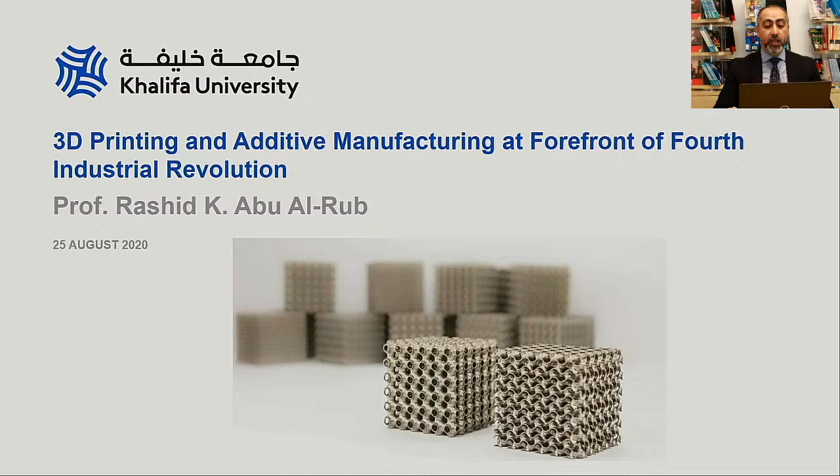Additive manufacturing is now a global disruptive technology which transforms many industries due to increased creativity in product design, easier production, reduced cost, and expedited on-demand manufacturing. Several UAE industries and governmental sectors started employing AM due to Dubai's strategy in 2016 in making it the world's 3D printing hub.

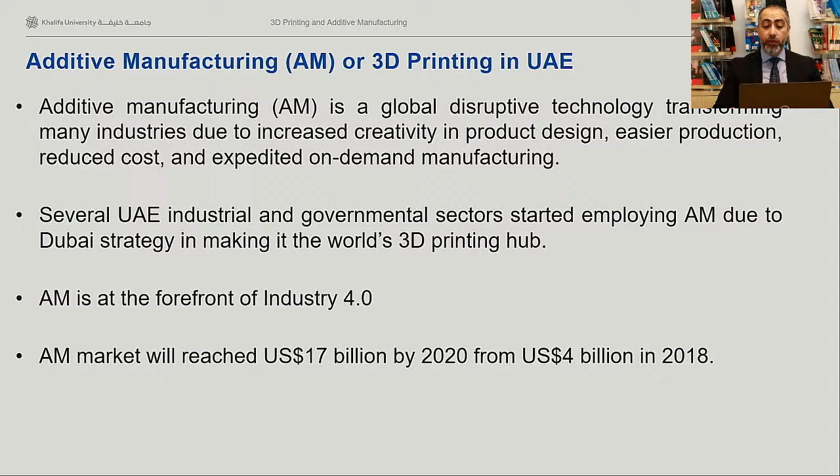AM is at the forefront of Industry 4.0, besides artificial intelligence, Internet of Things, robotics, and so on. The AM market reached 17 billion by 2020, from 4 billion in 2018. So we can see there is a significant increase in revenues coming from additive manufacturing, and there is an exponential growth these days in 3D printing.

UAE additive manufacturing strategy: in 2016, Sheikh Mohammed bin Rashid announced the strategy of making Dubai a hub for additive manufacturing, mainly focusing on construction.

Last July, His Highness Sheikh Hamdan bin Mohammed bin Rashid Al Maktoum announced the 3D Printing Strategic Alliance, stating: our goal is to accelerate the adoption and use of this emerging technology to support all governmental, economic, health, and scientific sectors in Dubai and the world. Through the Alliance, and in cooperation with 3D printing companies, we will enhance our industrial capabilities, secure our basic needs, and create new production lines based on the employment of future technology.

So that indicates the significant interest of the UAE in additive manufacturing. In fact, recently there has been news of a new ministry focusing on manufacturing and innovative technologies, led by His Excellency Dr. Sultan Al-Jaber, who is also the CEO of ADNOC.

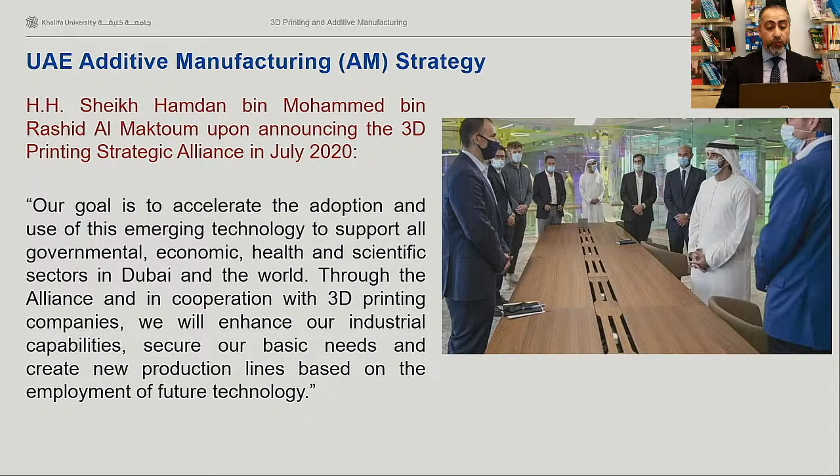Now, what is additive manufacturing? Commonly it is referred to as 3D printing. The industry really knows it as 3D printing, but these days they commonly refer to it as additive manufacturing. So it's one of the new manufacturing techniques.

3D printing used to be called rapid prototyping. People used to use it for making models in order to test their hypothesis or test their idea. Sometimes they used to call it solid freeform.

It's a process of joining materials to make objects from 3D model data, and it's a layer-by-layer process. Basically you build one layer, then bring the next layer on top of it, and the next layer, until you form the whole subject, which was first described in 1986 by Charles Hull.

Charles Hull filed a patent in 1986 describing the process, and we can see here a schematic from the patent itself showing the subject. You can see this is the laser source that is solidifying a layer at a time, and what we see here is a resin that, through the laser, will be solidified.

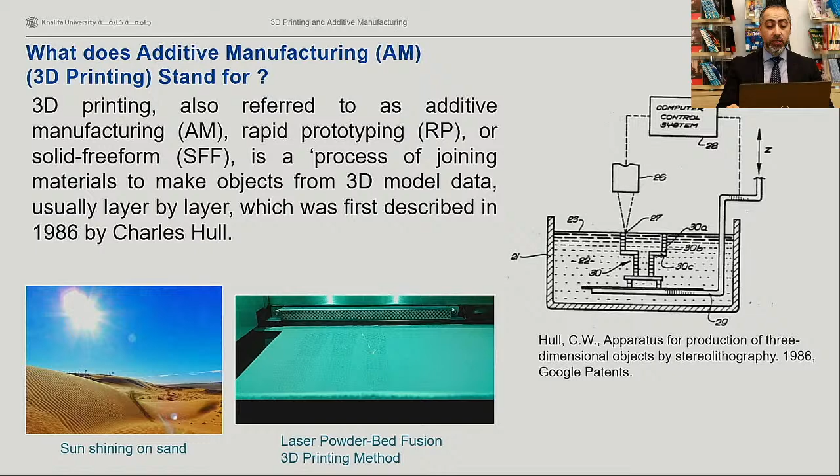That gentleman from Las Vegas went away from 3D printing, but his patent was later adapted by UT Austin, and they formed a company based on this patent. The patent filed by Charles Hull in 1986 resulted in one of the biggest companies in additive manufacturing, called 3D Systems, which is nowadays a leader in 3D printing.

Here I can show some examples of additive manufacturing techniques. One of the most famous and widely used techniques is what we refer to as the laser powder bed fusion technique.

So here you can see a laser source melting a powder layer. In this case, stainless steel powder is melted. The temperature from the laser exceeds the melting temperature of the powder, melting it layer by layer. Each subsequent layer has a thickness slightly bigger than the particle size of the powder. This process is a little slow, which is one of the disadvantages of additive manufacturing, and is why it's mainly used for niche or high value products these days.

Another technique used in the construction industry is material extrusion in construction. Here we see cement being diffused through a nozzle, and the cement has a certain fluidity that allows it to solidify immediately upon coming out of the nozzle. This is how buildings are being made these days, and the UAE is in fact one of the leaders in this additive manufacturing technique and its employment in making buildings, which will expand more in the near future.

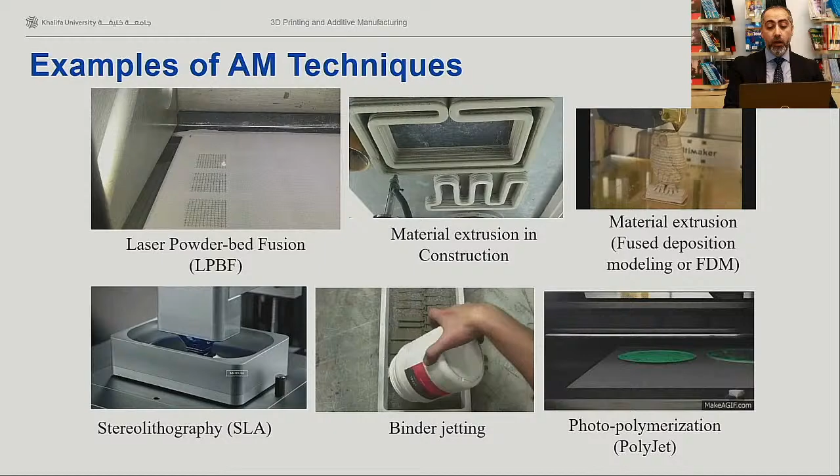Another additive manufacturing technique, one of the most widely used and the first kind of 3D printing technique, is fused deposition modeling, or FDM. Basically you have a filament made of plastic that passes through a nozzle, and the head of the nozzle heats the plastic filament, melts it, and deposits it layer by layer based on the object you want to print. It forms the object layer by layer in a relatively faster manner than other additive manufacturing techniques, and this technique is mostly used to print plastics or polymer structures.

These days it has also been used for making metallic components. In fact, a company now worth more than $2 billion, established in 2015, called Desktop Metal, uses the same technique used for FDM plastic printing to print metals.

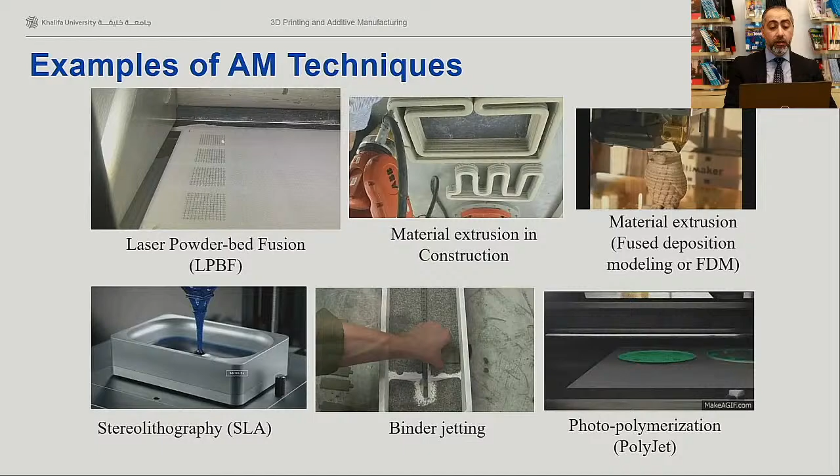Another technique, which is very good at making very detailed structures with high resolution, is stereolithography, which is based on using resins. That resin is solidified using a Blu-ray laser, similar to the laser used in Blu-ray CDs -- a low power laser. The nice thing about this technique is that it's relatively faster than other techniques, and it also allows you to print with very high resolution.

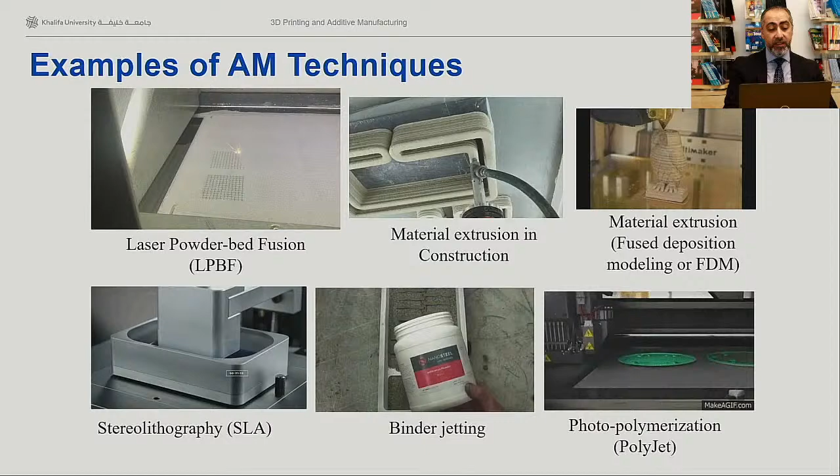Here you can see the Eiffel Tower being printed. Of course this is not real time, this is an accelerated video. To actually print that Eiffel Tower would take about 3 to 5 hours, depending on the resolution.

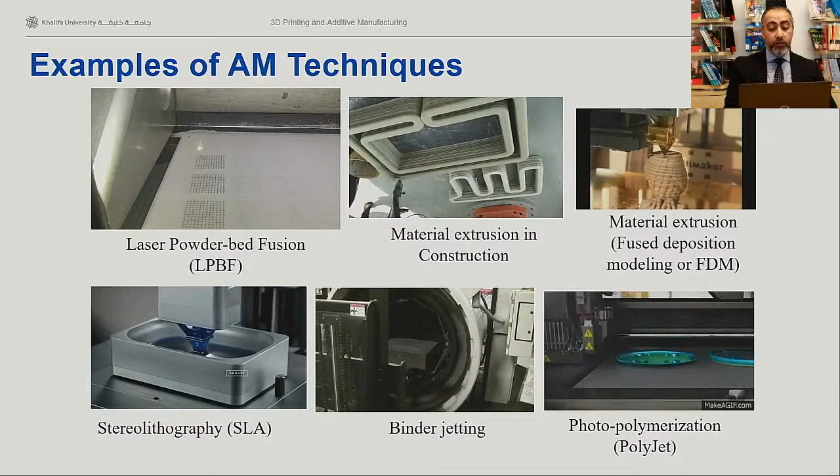Another technique being developed is binder jetting. This is also a technique based on using powder, mainly used by architecture engineers for printing models or architectural models out of gypsum. This technique is not mainly used for end user products as compared to the other techniques.

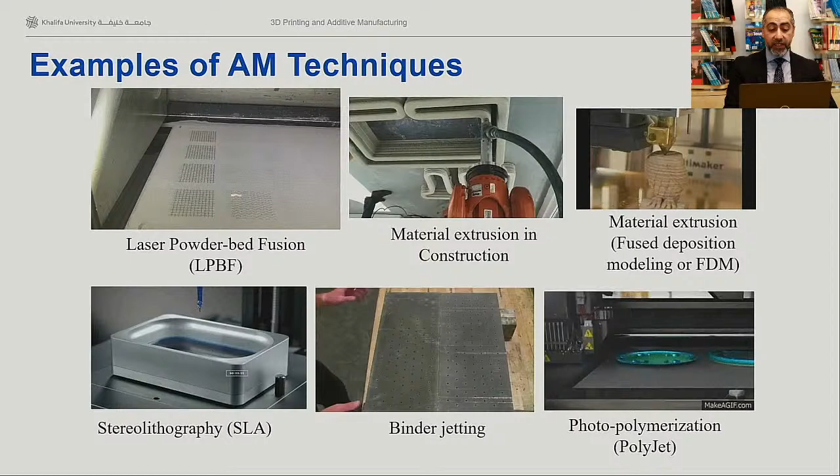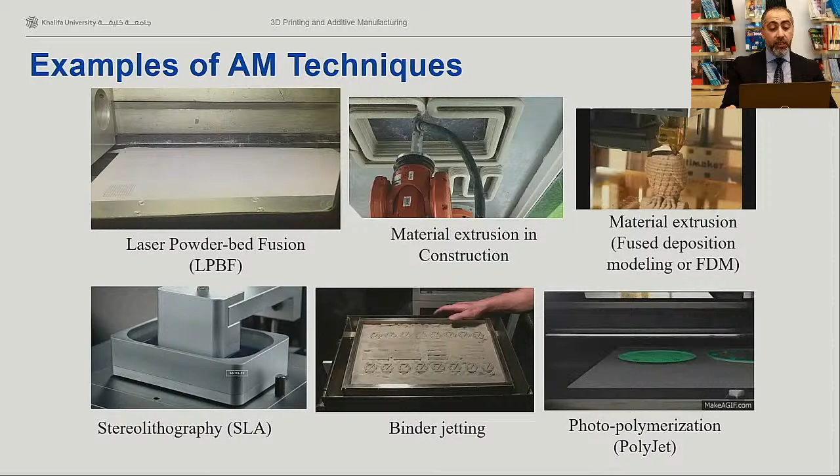Another technique is called photopolymerization, or polyjet. Here you can see a resin deposited layer per layer, and then a UV light cures that resin and solidifies it to make the structure. So these are some of the most famous additive manufacturing techniques that have been established.

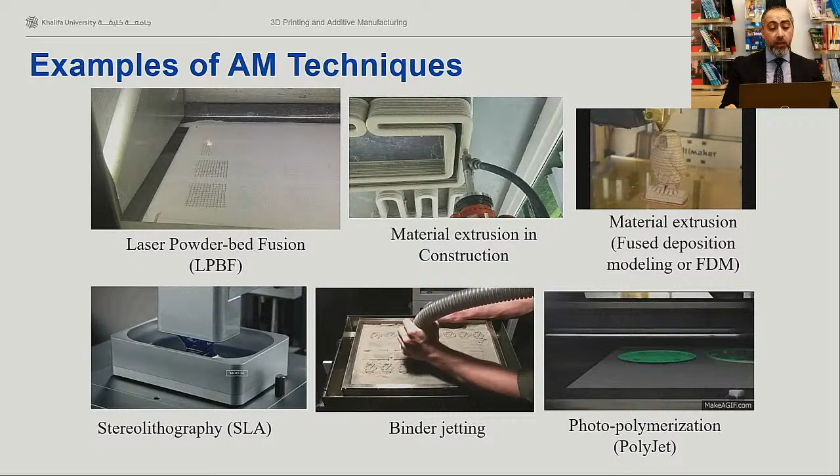As I mentioned earlier, there is a boom in 3D printing, and new techniques are coming up almost constantly to address some of the challenges facing the additive manufacturing industry, which I will highlight later in my slides.

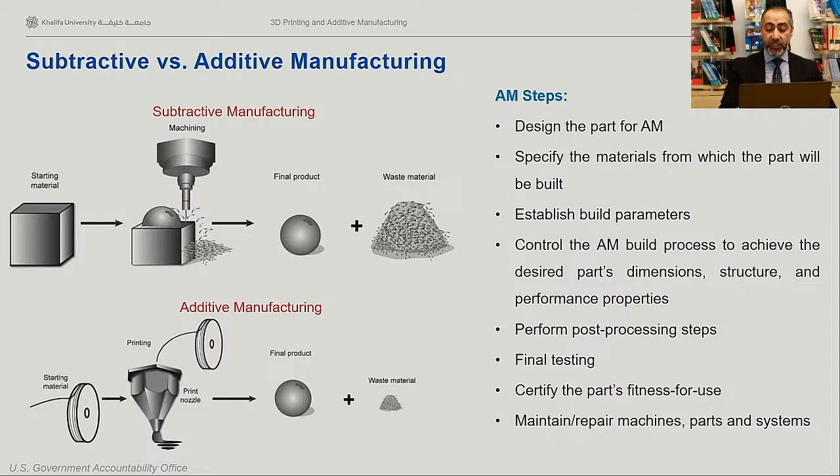You do final testing in order to certify the component in case you want to use it in a certain application. The other final step is to maintain and repair the machine, replacing certain parts of the 3D printer.

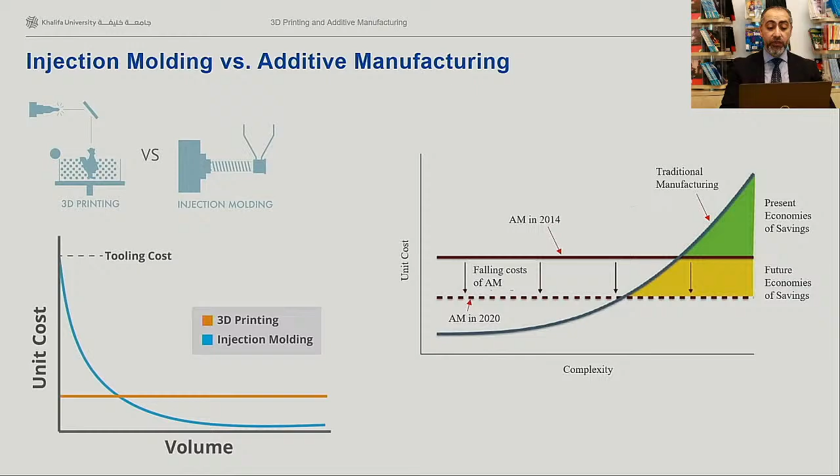So you can see here the falling costs of additive manufacturing from 2014 to 2020. Basically, it's reducing the cost more and more, and we expect this to be enhanced further, with the cost reduced more with more developments in the coming few years.

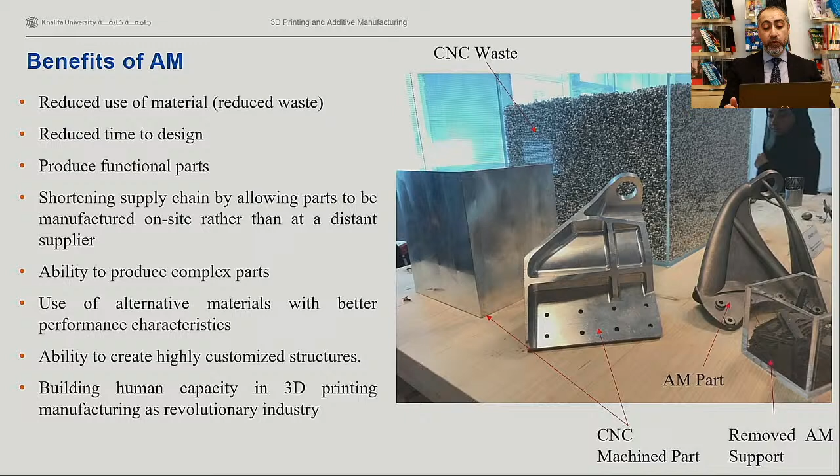Building human capacity in 3D printing manufacturing is a revolution in industry. A lot of students these days are interested in entering the field of additive manufacturing because the demand for people with expertise in this field is increasing exponentially with time, especially here in UAE. So with AM, you seriously need to dream big - all the time we say the sky is the limit with additive manufacturing.

So the process starts with the design. Since there's no limitation in the complexity of the structure you can design, you can design your component to be more functional, more cost effective, and to perform in a much better way.

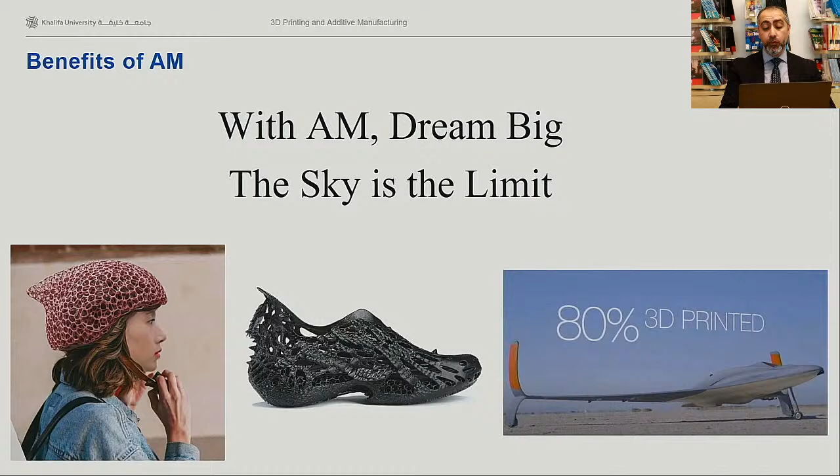UAVs, unmanned air vehicles that are 80% 3D printed, which has been demonstrated recently. These are some examples of industrial applications of additive manufacturing.

The leaders in additive manufacturing have so far been aerospace, and the reason is that it's a niche industry where cost is not really a big issue compared to other industries. This is why they're willing to invest money for the sake of enhancing performance and the safety of the airplane.

You can see some of the components here. This is a fuel nozzle fabricated by GE, which was a game changer in 2015 because they used to fabricate it out of 20 components, but with additive manufacturing they fabricate it in one shot without any joints, which reduces the time. In fact, they redesigned this fuel nozzle to enhance performance.

You can see applications in medical, specifically in the dental industry, where additive manufacturing is used for customized implants for the human body, or here for dental applications.

Other applications are also in space, looking into additive manufacturing specifically for enhancing performance and lightweightness. You can see here a very successful example done by Etihad Airways.

We helped as Khalifa University in giving the needed expertise for Etihad Airways to achieve this great milestone, which is that they printed the shroud, or the video monitor. So we reverse engineered it and printed it to be exactly the same as the one fabricated by traditional techniques. It has been certified within 6 months, so it was a very successful story.

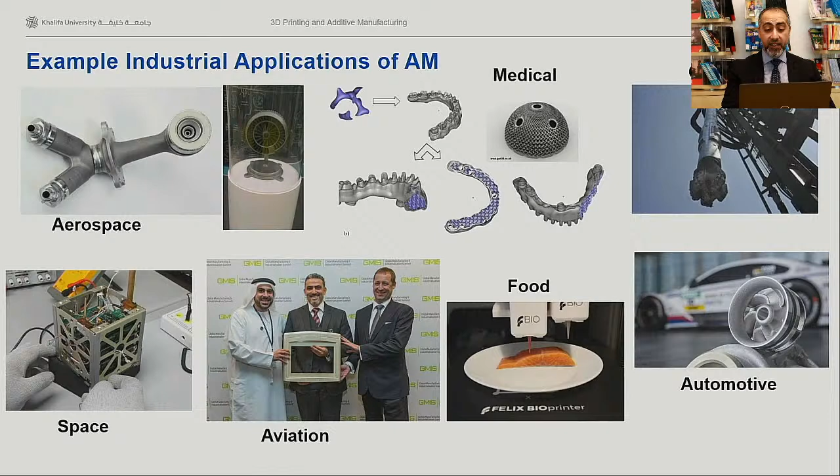In the construction industry, Dubai and the UAE in general are these days a leader in additive manufacturing or 3D printing in building and construction. As I mentioned earlier, Dubai plans to have 25% of all buildings built with 3D printing by 2030. So this is one of the objectives of making Dubai and UAE a hub of additive manufacturing.

We can see here the world's first 3D printed office in Dubai. And just last year, this 2-story building, which is Dubai's largest 3D printed structure in the world, 9.5 meters tall with a total area of 640 square meters, was fabricated through additive manufacturing.

We can see the real potential of additive manufacturing in the construction industry in reducing construction time. There are a lot of areas where houses are missing, and areas with wars and refugees who need homes. Imagine how 3D printing can be used to construct structures within a matter of a day - that's definitely a game changer.

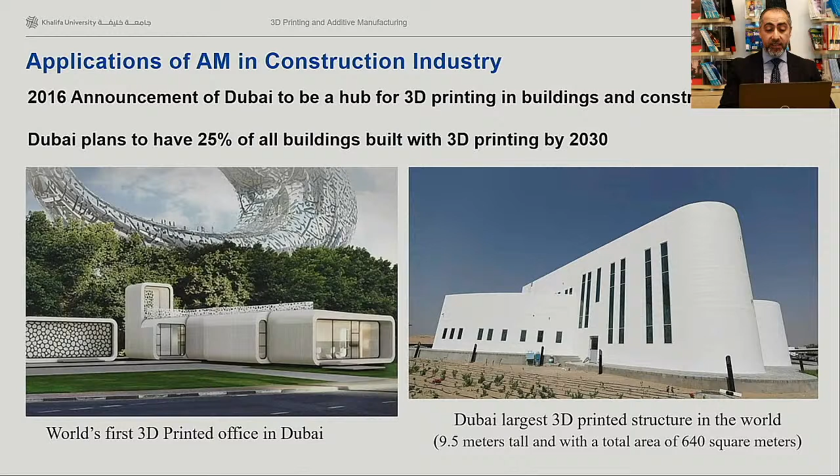Opportunities available through AM, as I mentioned, include complex parts, especially complex spare parts. Imagine you have your inventory of components, and you can reverse engineer a component - scan it, convert it to a CAD file, and then print it.

A lot of components these days in many companies - in the nuclear industry, oil and gas industry, aerospace industry - certain components cannot be fabricated anymore because the supply chain is closed. So if you have the old component, you can reverse engineer it, create the CAD file, and print it.

The spare parts can be fabricated in one shot. As we said, this means material saving. It can be used for mass production, with less post-processing.

This is an example here - I show the reverse engineering process of a component that we developed in collaboration with Abu Dhabi Police. For example, in a hit and run case, where somebody hits you and runs away, you couldn't catch the license number, but you reported the accident.

You can see here, for example, a component of the rim. Some of the debris left at the accident scene can be reverse engineered, printed, and sent to service stations for checking. Once the car comes to these service stations for repair, they can know exactly the size and shape of the component left at the accident scene, and they could be able to catch the person who caused the accident.

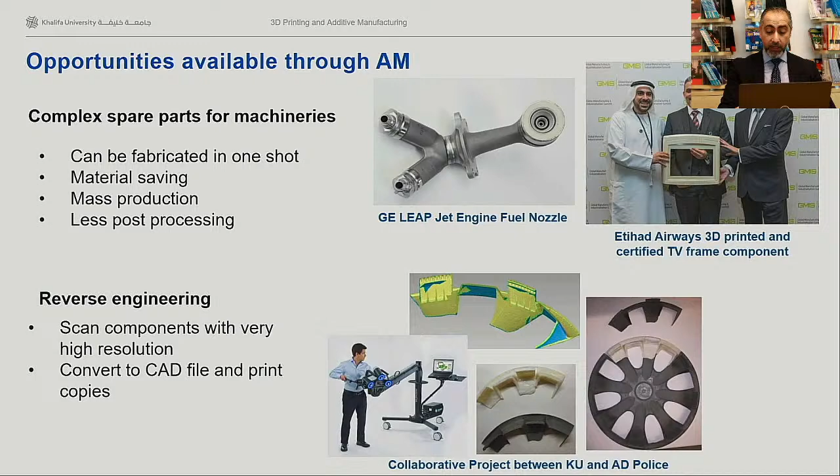One of the advantages of additive manufacturing is that it makes stronger parts. AM has been used to fabricate a common stainless steel, which imparts a unique microstructure, making it stronger and more ductile than production with conventional methods.

You can see the unique microstructure because of 3D printing. This is for stainless steel, and you can see the microstructure is very complicated. There's a lot of what we call dislocations, and these dislocations are responsible for strengthening, making the structure stronger.

You can see here, for example, the strength versus the elongation, how much you stretch the component. These curves show the component made of stainless steel tested, having much higher strength and much higher ductility, or strain to failure, as compared to conventional techniques. That's a huge value. You are making the same component with the same material, but with a different fabrication technique, you end up with a much stronger component.

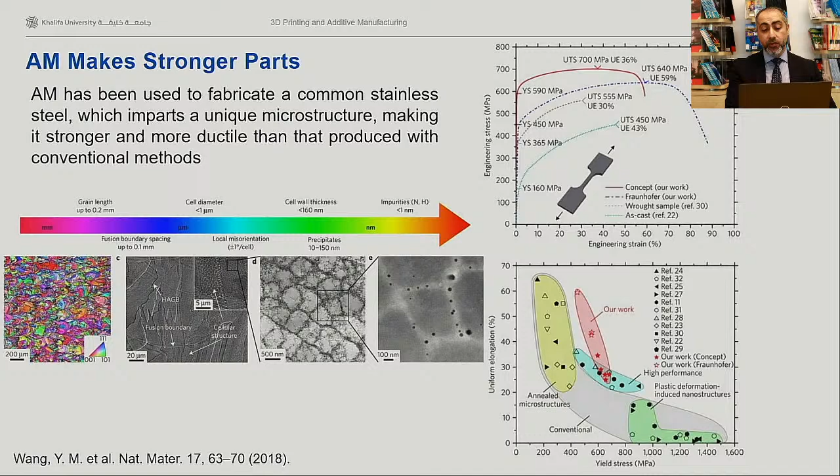Another big thing that needs to be developed in additive manufacturing, especially because it is still in the development stage, is materials. There are a limited number of materials available for 3D printing as compared to conventional techniques. For conventional techniques there are millions of material options, while for 3D printing there are thousands. So you can really count the materials available for 3D printing. There is a need for development of new materials.

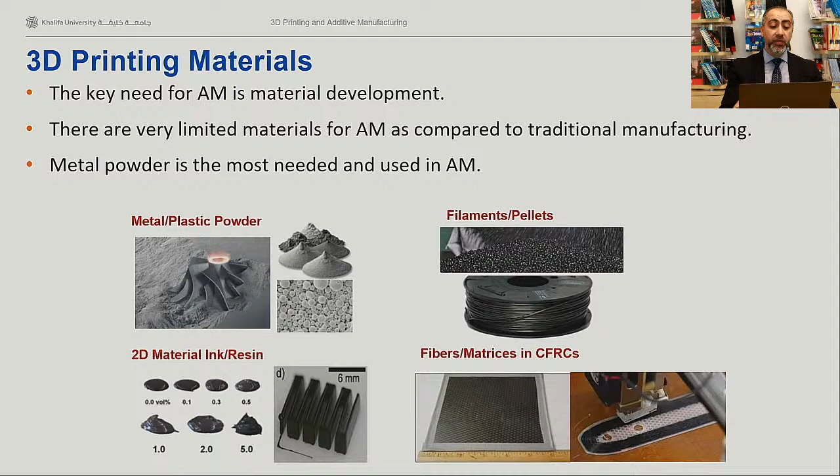In fact, metal powder is the most needed and used material in additive manufacturing. Metallic additive manufacturing, to print metallic components, is becoming really hot these days, and a lot of companies are looking at 3D printing with metals. You can see materials made in the form of powder, materials made in the form of filaments or pellets, as Borouge here in UAE is doing, or materials in the form of ink or resin, or even composites in terms of fibers and matrices. These types of materials are being developed for additive manufacturing.

The challenges of additive manufacturing: first, guidelines for selecting additive versus subtractive manufacturing. How do you choose whether to make a component through additive manufacturing with 3D printing or through traditional techniques? These guidelines are being developed but are not yet fully developed.

Standards for using recycling and reuse of materials are needed. In metallic 3D printing, you're using powder and need to recycle it for reuse, so there should be standards. Standards for environmental conditions affecting AM material, heat treatments and procedures needed to reduce anisotropy, meaning changing properties in different directions, are also needed, along with guidelines for post-processing and standards to obtain minimum properties, qualification, and certification for parts.

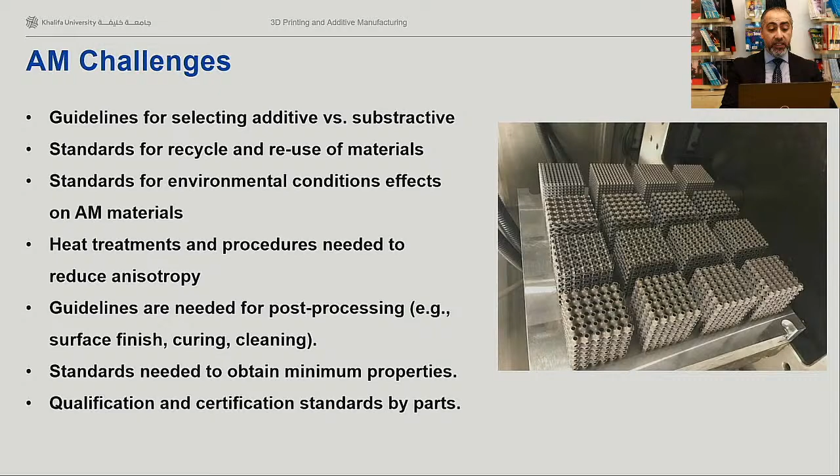All of these are needed. Some of these challenges are being addressed by the American Society of Testing Materials Additive Manufacturing Committee, established in 2009, which now has about 900 members. We are going to be a UAE member very soon. More than 25 standards have been developed, all focusing on the employment of additive manufacturing and how to certify and qualify an additively fabricated component.

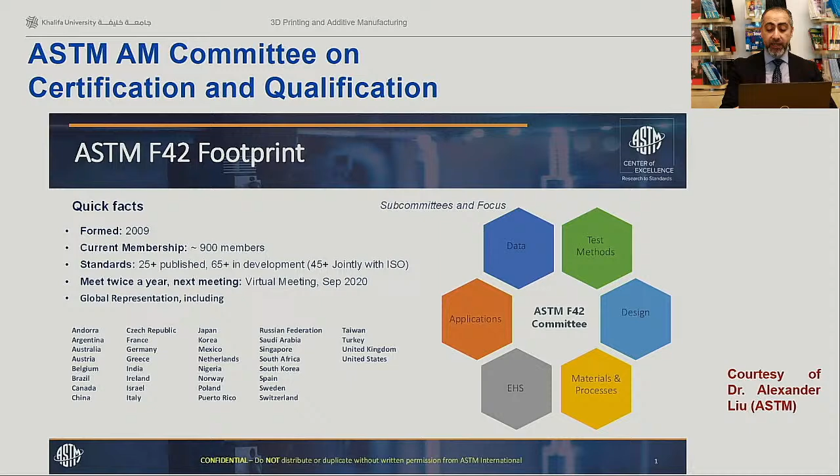Here at Khalifa University, we were one of the leaders in UAE in additive manufacturing, starting from 2013, where we reached out to several industries in UAE to make them aware of the importance of this new additive manufacturing technique. We established ADAM Center in July 2019. ADAM stands for Advanced Digital and Additive Manufacturing Center, and it serves as a state-of-the-art research, development and educational facility in the area of AM, and will be a platform to provide services to industries across the UAE. It will also be used as a platform for capacity building, for educating students, and for educating industry leaders about the importance of additive manufacturing.

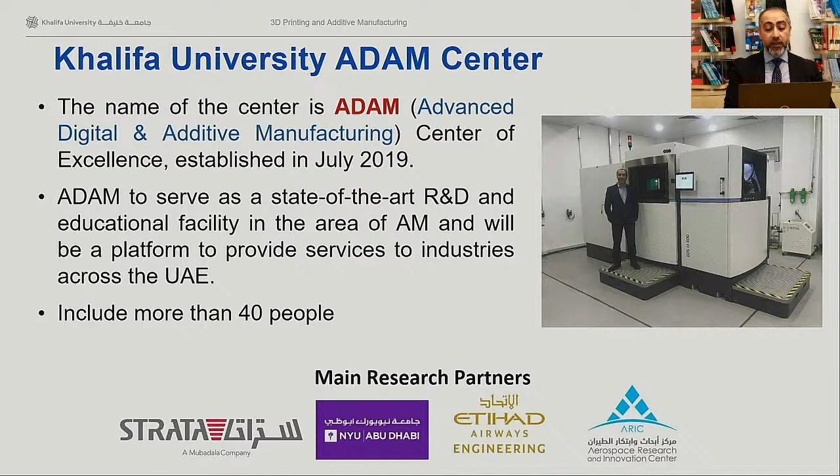We have more than 40 people right now, with faculty, students, and postdocs working within the center. Our main research partners include Strata, a big player with us, New York University Abu Dhabi, a close collaborator, Etihad Airways, and the Aerospace Research and Innovation Center.

The themes of the Additive Manufacturing Center span the whole process of 3D printing, starting from the design process of the component, then the materials needed for printing, how to make the component lighter and more functional, looking at the properties of that component, and even the certification and qualification of the component. Theme 5, as I mentioned, focuses on education, making workshops for students and for the industry.

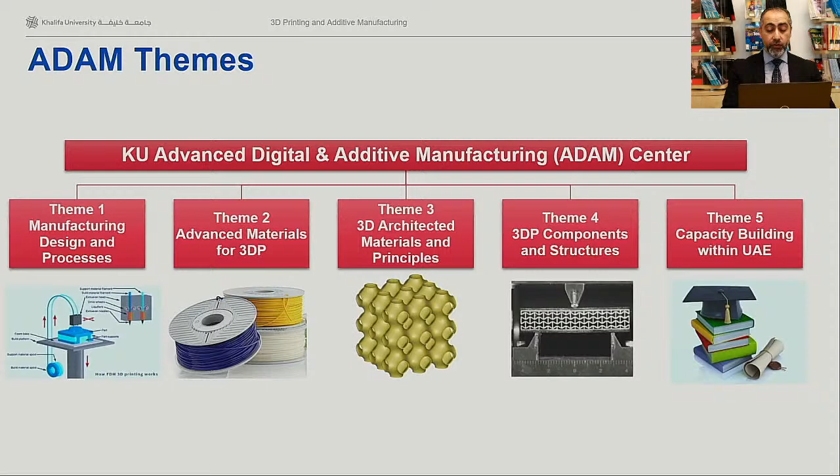Some of Khalifa University's industrial additive manufacturing capabilities include many printers out there. Mostly they are desktop printers, small printers that are really used to fabricate components. The prices range from $100 up to $1 million.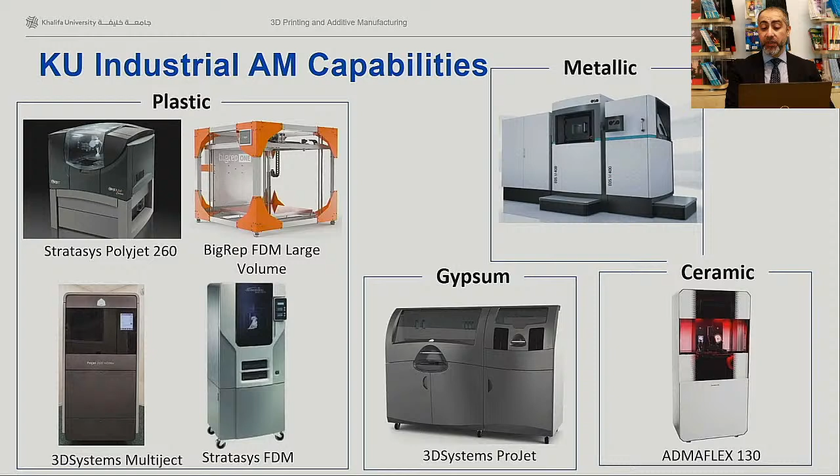It can print large components out of various types of metals - stainless steel, inconel, maraging steel, aluminum, and so on. And we also have the capability to print with ceramics, which is very important for the harsh environments here in UAE.

Lastly, I would highlight some of the activities we've done at Khalifa University related to additive manufacturing. In fact, we filed several patents. Because of 3D printing and the ability to fabricate very complicated and functional components, we've been engaged in making what we call metamaterials and metastructures - materials or structures driven by topology rather than chemistry. So this is a new concept of making materials and functional components.

We applied these types of materials to making membranes, spacers for desalination, water treatment, or wastewater treatment, static mixers used by the water and chemical industries for mixing different fluids, and catalytic converters made of ceramics with enhanced performance, mainly used by the oil and gas industry and the automotive industry. Also heat exchangers to enhance performance and make these important components more compact and with higher performance for many industries.

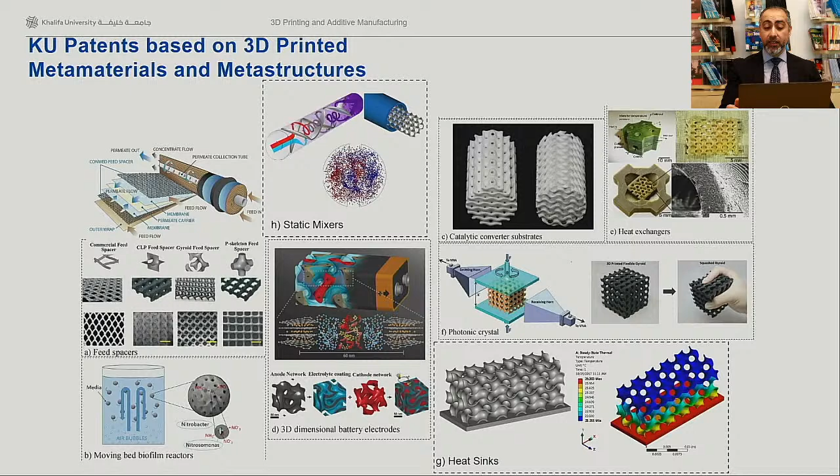Batteries - three-dimensional batteries - that's another thing; you can print a three-dimensional battery for enhanced energy capacity and power. Heat sinks for dissipating heat, which is very important. I can see my laptop right now is heating up as I'm closing to finish my presentation, and there's a fan running. With additive manufacturing, you can make the dissipation of heat much more efficient.

With that, thank you very much, and I welcome any questions.

So I'm looking at some of the questions I've received. The first question is: do you believe that 3D printing has a future in UAE? Will the country depend on it? As I mentioned, UAE has a very big and ambitious strategy for adapting additive manufacturing and 3D printing in many industries.

In fact, many industries right now in UAE are interested in employing additive manufacturing. I believe 3D printing has a future in the economy - not just UAE, but in all countries around the world. There are many countries that have been very active in additive manufacturing as compared to other countries in the Middle East. For sure, UAE is one of the leading countries in adapting additive manufacturing.

We showed some examples in construction, where large functional buildings are being built based on 3D printing in a very short time. In fact, recently DEWA, the Dubai Electricity and Water Authority, built a research facility using 3D printing, and it's going to be inaugurated very soon. Will the country depend on it? I wouldn't say that.